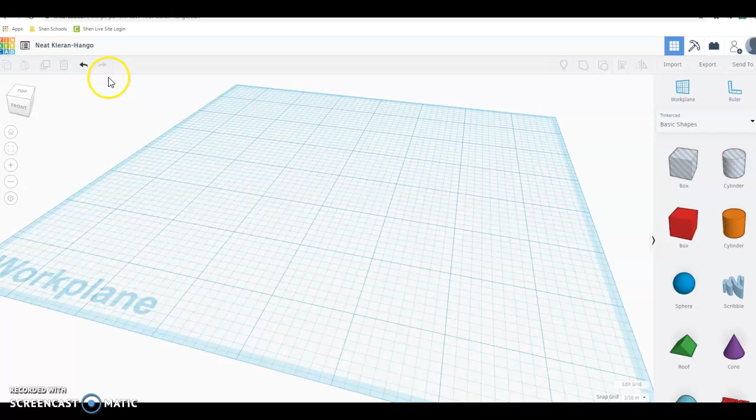Now that you've learned a little bit about TinkerCAD, we're going to go ahead and do our first design program. The product is going to be the cardboard piece we did for machine practice with all of the different cutouts

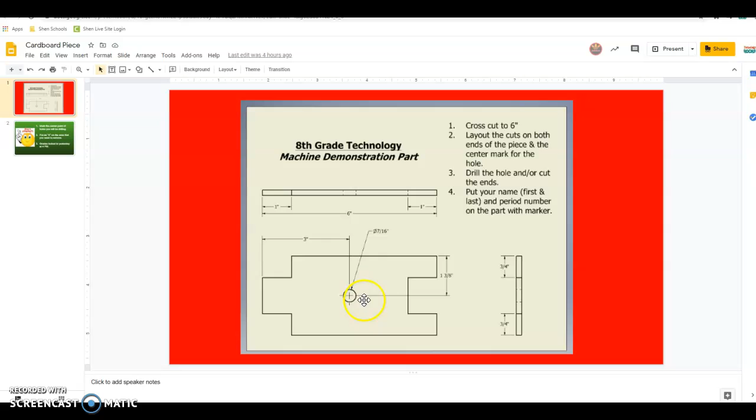and the hole in the middle of it. So what I'm going to do is rename the object, and I'm going to call this machine practice. You want to rename all of your files because, like we've talked about, TinkerCAD assigns a name to it, and for organizational purposes you want to have your own file name so it's easy to find.

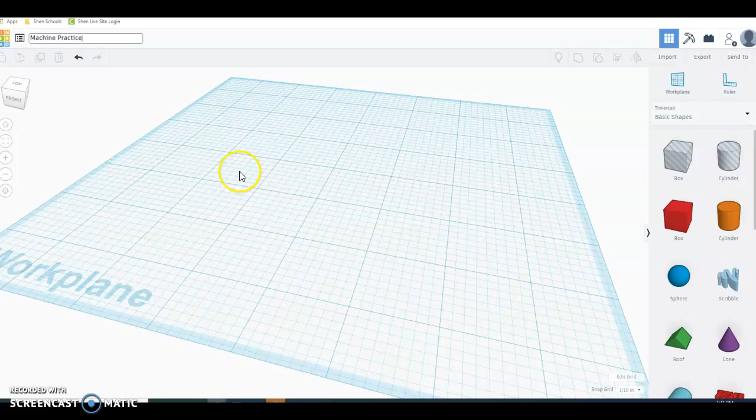Hopefully through the videos you've learned how to rotate around, zoom in and out, and as we've mentioned in the past, it is a lot easier to use a mouse in this design program than it is to use the keypad on your Chromebook or laptop.

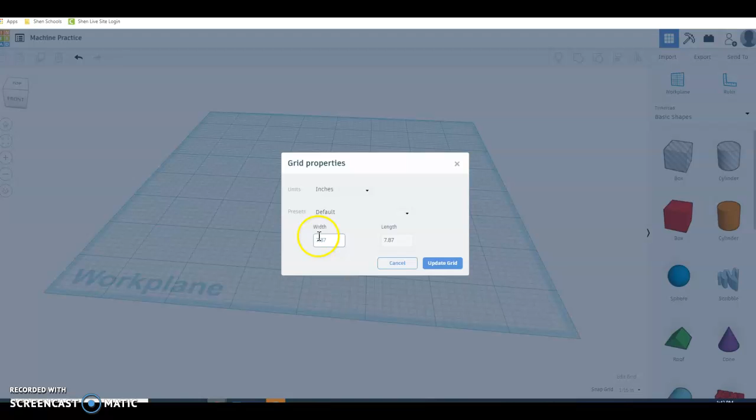The grid we've edited to place it in inches. We've left the sizing of the plate. The snap grid is down to 1/16 of an inch.

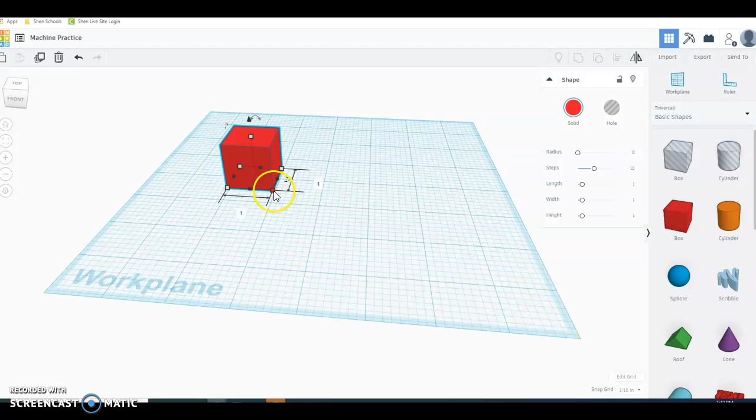We're going to start by pulling over a box, and we're going to use the overall size of the piece. We're going to start with the total area. If you made this out of cardboard, you would know that it's going to be 6 inches in length. So I select that area, I click 6, hit enter, and move that back onto the piece.

If I go back to my measurements, I know it is 1 3/8 of an inch to the halfway point of my piece. So the total would be 2 3/4. I'm going to simply click here, 2.75.

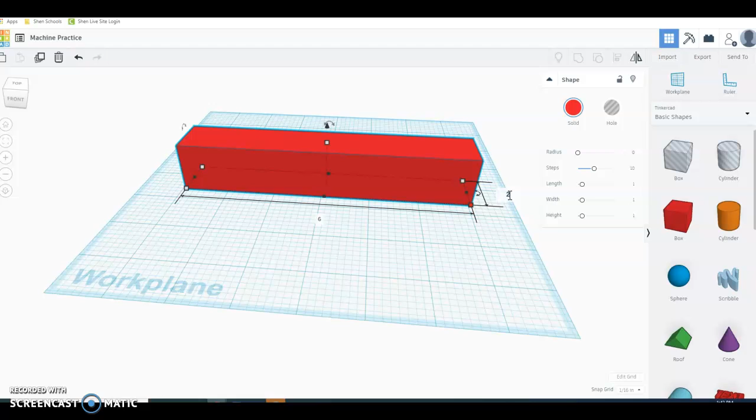And then the thickness, we changed to 1/4 of an inch to make it easy to draw on our graph paper. Your cardboard is not going to be that thick, but we will stick with 1/4 of an inch. Now I have that basic shape, which would encompass all of these areas.

I'm going to start with some of the simple pieces. I'm going to go through and remove this chunk here. I know it's 3/4 of an inch that will be left of cardboard there, and 3/4 of an inch that's left of cardboard at the bottom.

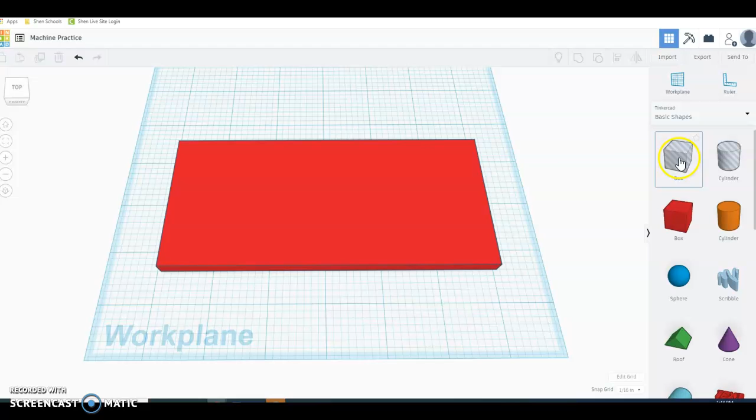Going back over, I need to pull in another box here. I want to make sure it fits and goes flat to the plate, the design area. If it is not, it will not cut out that entire piece.

Going back, I'm going to have to reference this a couple times. I know that it is 1 inch into the piece. So I'm going to make that block 1 inch. And it is 1 inch.

The next thing I need to figure out is if my total height of the piece right here, or width, depending on what you want to call it, is 2 3/4 of an inch. I know I need to leave 3/4 here and 3/4 here. That means I need to leave 1.5 inches full of material.

What I have left is 1 1/4 inch of material. I select there, 1.25.

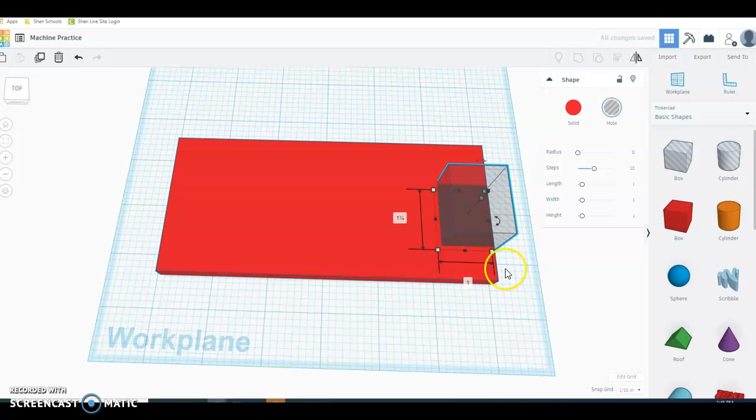I'm going to rotate around, and since we made the edits to that snap grid, I can move in 1/16 of an inch increments in different directions.

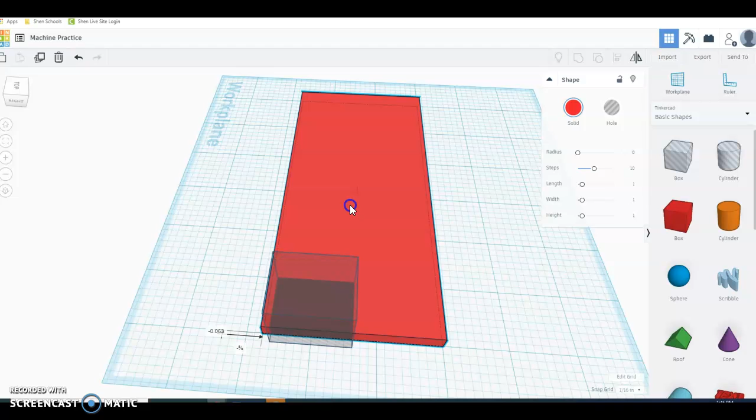I can count my blocks. I can also move the rectangle so I know if I'm in the right location.

Over here I have 1, 2, 3, 4, 5 blocks. Over here I have 1, 2, 3, 4, 5, 6, 7. If I slide it over 2 spots, 1, 2, 3, 4, 5, 6. So that is an even number.

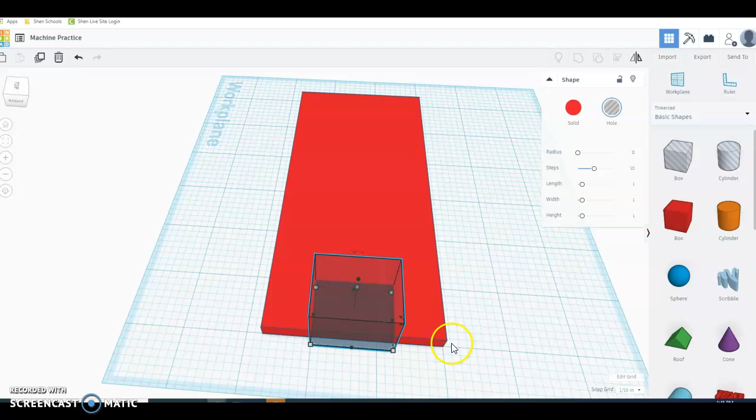I need to make sure my block that I'm cutting out is the full inch. Rotate around, that looks good. I'm going to lower this down because I don't need to be up so high. As long as it is above 1/4 of an inch, we shall cut through it.

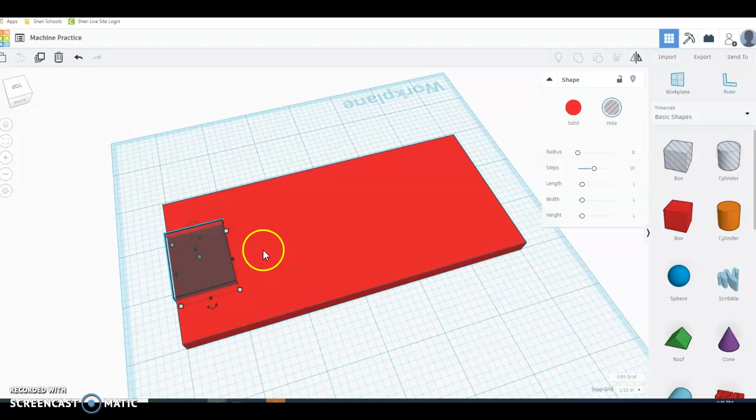A reminder, the block is selected. I hold down Shift on the keyboard and I select the area and group it. That piece is now removed.

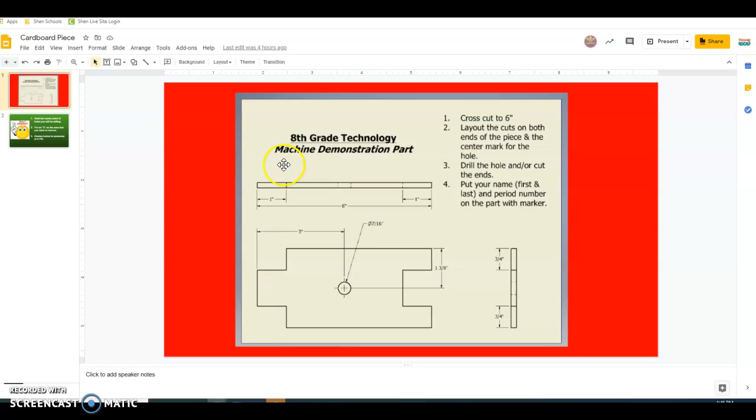I'm going to repeat this process to cut out this corner in the top. A 1-inch block, 3/4 inch. So it's going to be a rectangle, not a square.

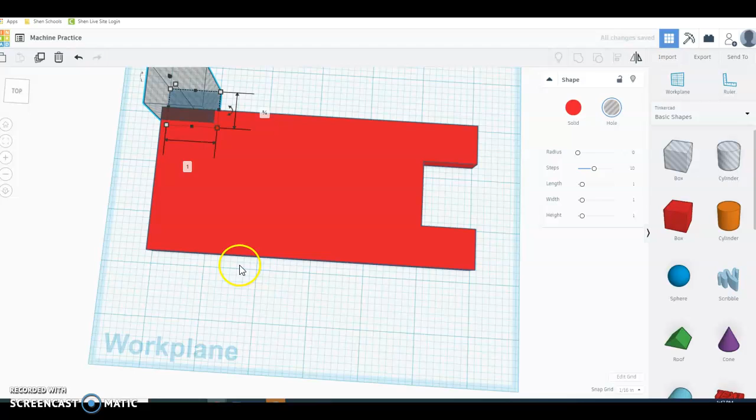I bring the box in. Going to resize it by clicking on the outside. I know that this needs to be 3/4, which is 0.75 by 1 inch, and I'm simply going to rotate around so I can see a little bit easier. Use my arrow keys to move that block right into the corner.

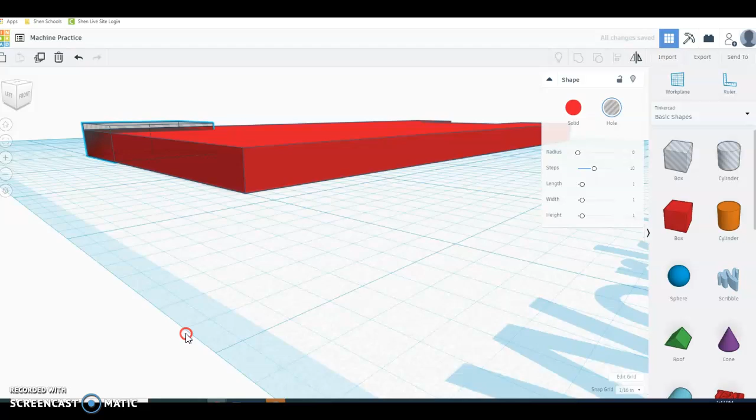I don't need to be super high again, just at least 1/4 of an inch. I'm going to hold down Shift, select the block, and group it. That piece is now gone.

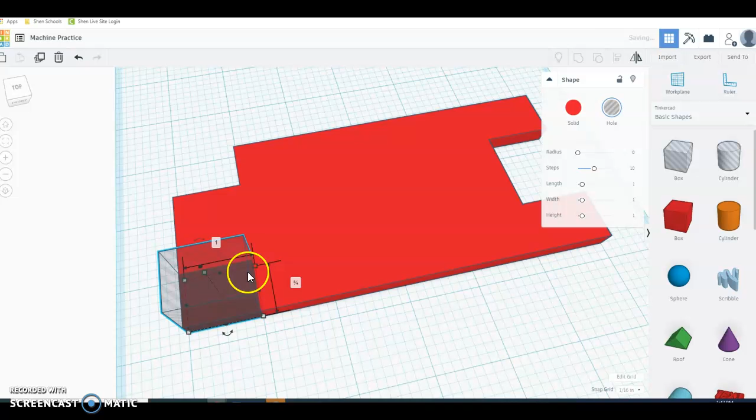I'm going to repeat that procedure for this corner. 0.75. I'm in the corner, resize the height of it. Hold down Shift, select the rest of the block and group it. Sorry, not ungroup.

I have all of those areas. The last thing I need to do is cut out the circle. It says it is a 7/16 of an inch circle.

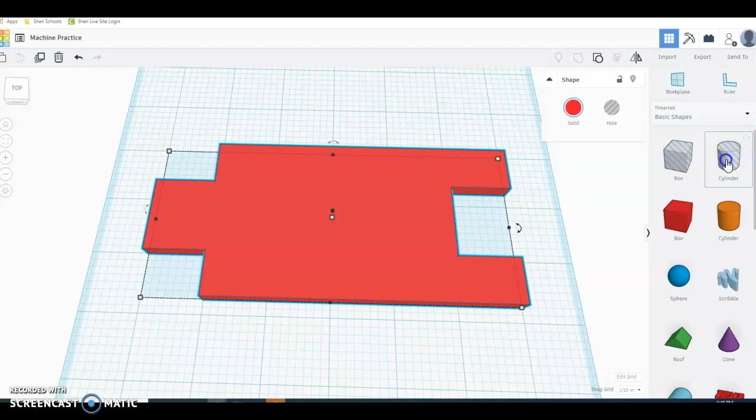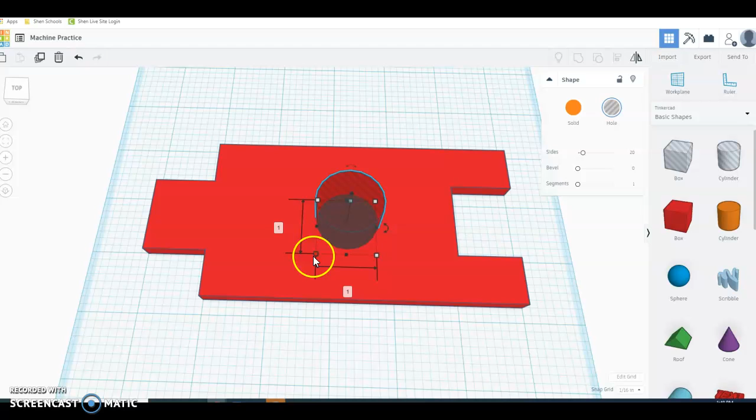I am going to go back, use the cylinder, 7/16. If you do not know the size, you can use the calculator. Seven divided by 16 is 0.4375. I need to change that in both areas.

0.4375. Enter. So now it is a complete cylinder.

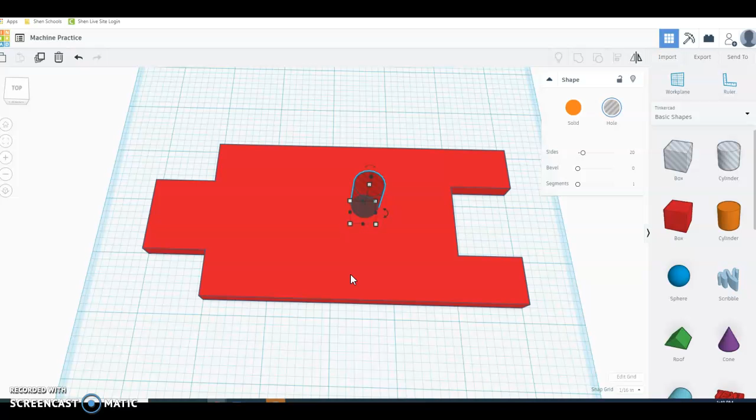The hard part may be locating where exactly this cylinder will go. Using the grid, I can tell that I have one block here, 2, 3, 4, 5, 6. Each block is an inch when I do the snap grid at 1/16 and I change the grid to inches.

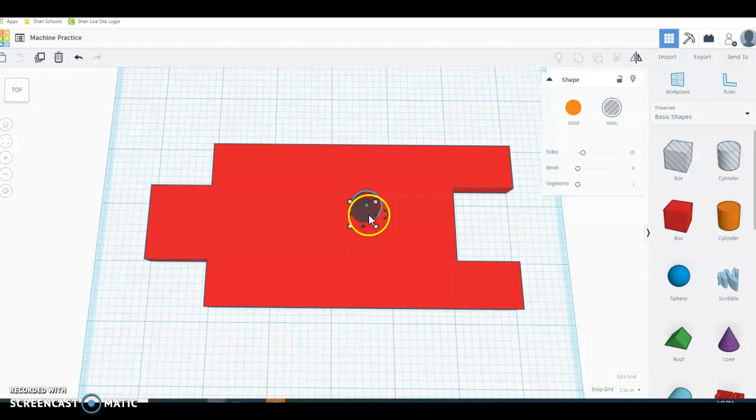If I know I need to be 3 inches over, I'm going to be right with the center mark on this line here. The other measurement I need is 1 3/8 of an inch, halfway from the top down.

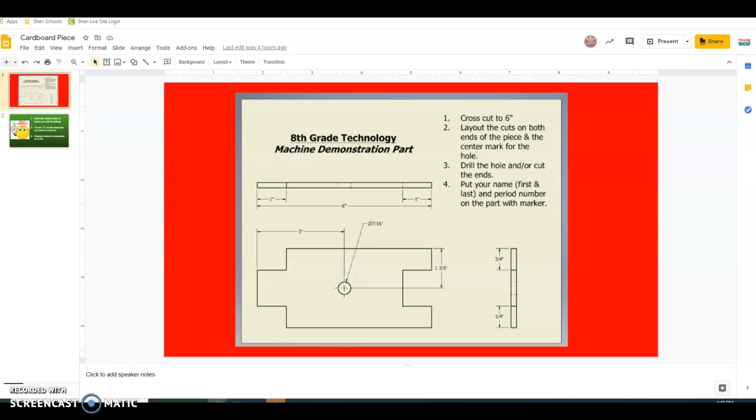I can rotate around to give myself the best view of it. I can even look underneath to make sure I'm in the center. You can tell I'm not directly in the center, so I'm going to use my arrow keys to get me closer.

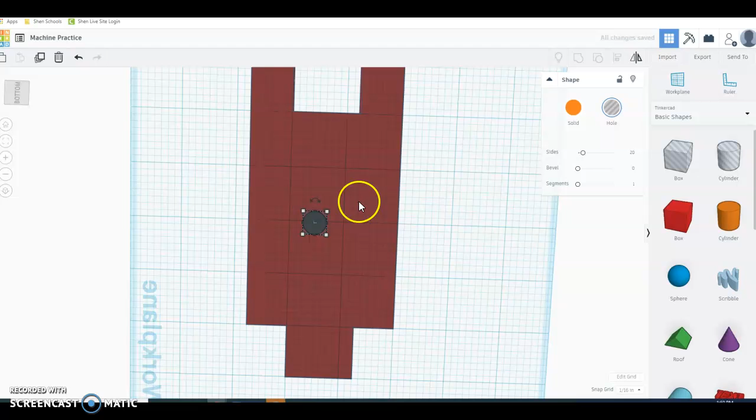One full block, and halfway. One full block, one full block on the line. There we go.

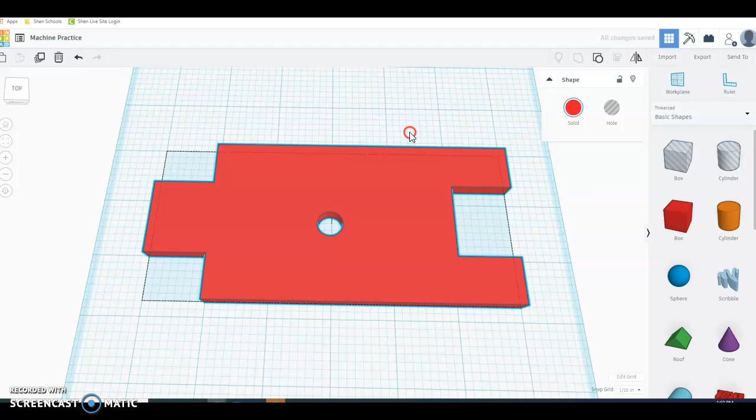Hold down Shift for the last time, select the object, and there we are. We now have our cardboard cutout that we used for machine practice with all of the correct dimensions.